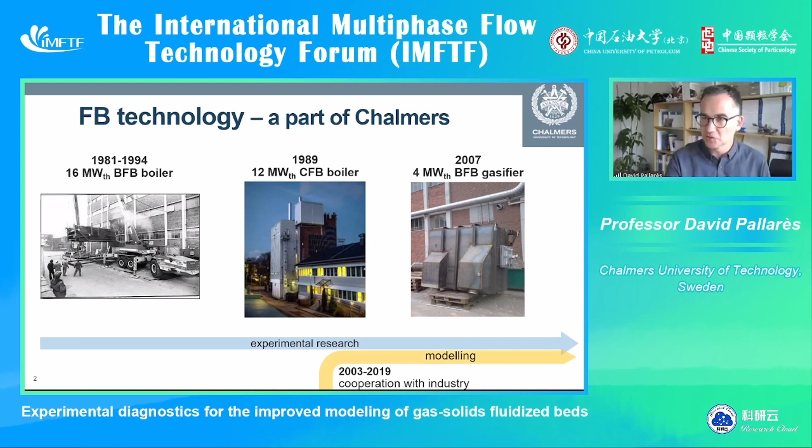Our group started experimental research from the installation of the very first boiler in '81, but we started with modeling also in 2003 - that's when I started my PhD and developed an interest in modeling. We then began cooperating with industry to develop models for fluidized bed combustion mainly, and now we've extended those to cover other fluidized bed applications beyond just combustion.

With that short background, here are the points I'll go through in my agenda. First, as I said, I'd like to talk a bit about modeling - not the focus of this presentation, but I want to link to it. Then I'll talk about fluid dynamical scaling, something we've used a lot in our activities and found extremely valuable. Finally, I'll dive into different experimental techniques which are not off-the-shelf, so to say - they are advanced and need development, but they provide information otherwise not attainable by classical techniques.

So let's start with the first section. It's about modeling. Here is a diagram which I really love. It's from Finland, Lappeenranta University.

Here they classified different modeling approaches for fluidized beds, and they divided this in space and time dimensions, depending on the resolution of those. Here we can see the different types of modeling. I will just activate my pointer.

So we have the most resolved modeling, like direct numerical simulation. This is a particle scale, and then we would enter discrete element modeling. We lose resolution—we are not resolving at the same scale as direct numerical simulation. And then we would go into still CFD, Eulerian descriptions.

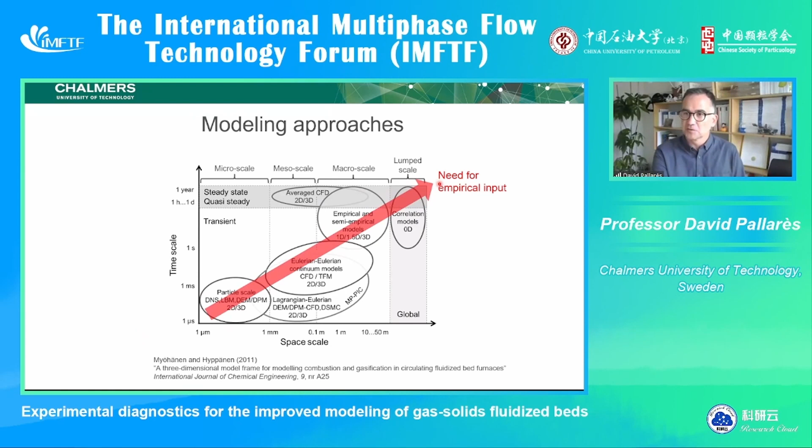So this is what I will speak about today: which techniques do we have at hand to provide this empirical input?

If we go to the different types of modeling, and we class CFD as the type of modeling that solves all of these balances—mass, energy, and momentum—then we have a lot of softwares. One of the most known is ANSYS. That's a commercial one, but there are other ones which are open source also.

And here, still today, I would say the main challenge is in the closure, the formulation and closure of the momentum balances. That's still a research field in itself. And again, the more you simplify—the most simplified version of CFD is this Eulerian approach—the more you need to compensate with some kind of empirical input, like for the subgrid models, for example.

So, in summary, I would say this kind of approach is most often used by researchers, sometimes by industry to solve specific problems or issues. And the computational cost related to other types of modeling is high.

Then we have the semi-empirical model I was discussing. We solve mass and energy balances, but not momentum balances. So what we do instead is substitute those closures of the momentum balance with empirical knowledge or some assumptions on the velocity field, for example. With this, we can reduce the computational time drastically.

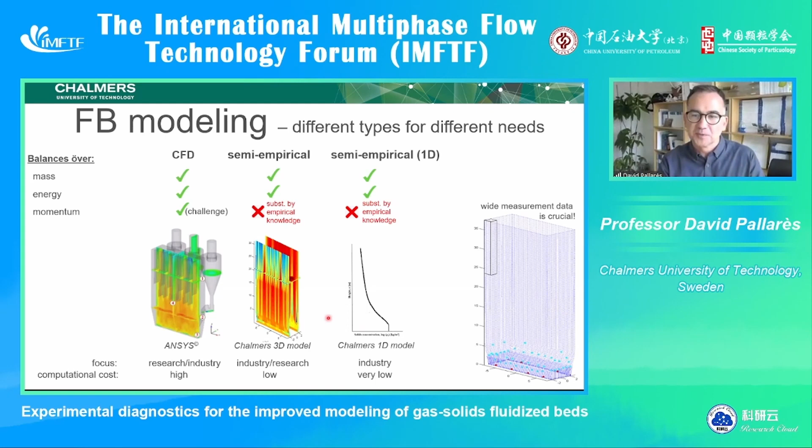So the semi-empirical modeling requires validation. These are measured oxygen concentrations at a 330 megawatt boiler. This is a measurement campaign at 19 meters above the grid, showing the oxygen concentration field. There were about 30 measurements, and then we could reproduce this oxygen concentration field with the one produced by our model. With this, we're able to fit different parameters like gas dispersion and so on. So this kind of data is needed for the empirical modeling and fitting of those parameters.

For 1D, what we need is experimental data from the process. So it's process data, typically heat flows, heat and mass flows of the steam and so on, so that we can calculate enthalpy heat flows from the furnace, for example.

So here we introduce our model, this is in Modelica, but there are other formulations, other softwares too. We substitute typical boxes. Some commercial codes have a fluidized bed box, but that's designed for chemical reactors, and they don't describe boilers properly. So we did our own box for a boiler, bubbling fluidized bed or circulating fluidized bed, that we can introduce in a steam process, on a steam cycle, and see the interplay between the furnace and the steam side.

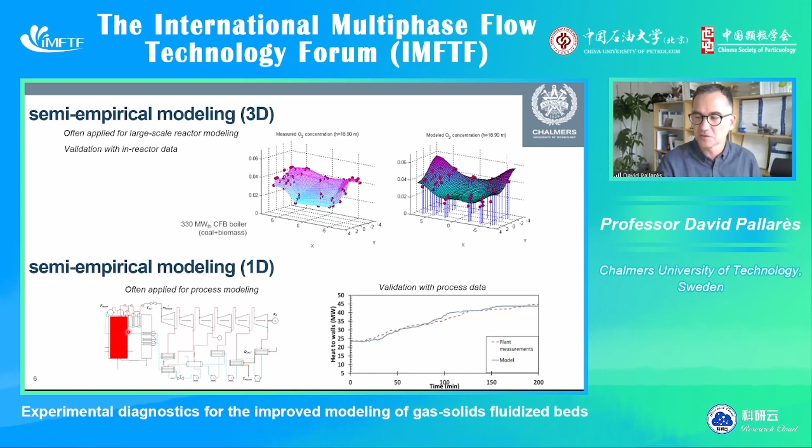Well, and this is the last slide. I think it's probably the most important in this presentation. No numbers, just words, but I think still it conveys the main message I would like to give. And it's that we always should look for an iteration, a synergetic iteration between modeling and experiments.

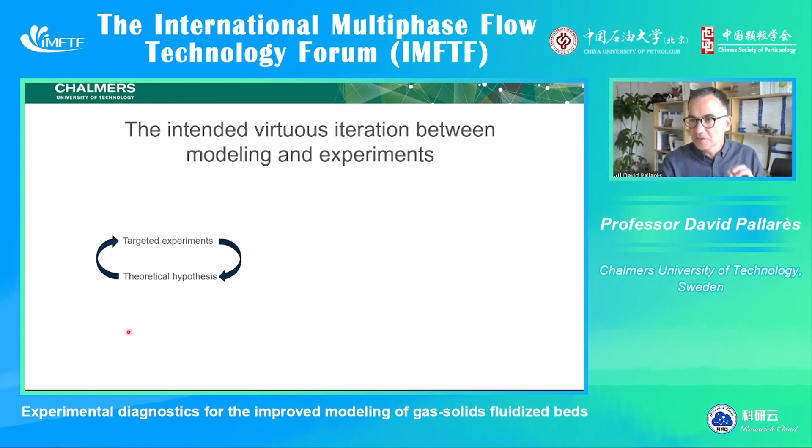So if we start with this iteration, typically when you develop a part of your model, a sub-model, you have a theoretical hypothesis on how things should work. Based on that, you need to define which kind of experiments you want to carry out in order to confirm or discard this hypothesis. So these are targeted experiments, experiments in which you attempt to extract specific information about a specific parameter. So this is working at a specific level.

When you have this new submodel, you can put it into your whole model and then run your large-scale simulations. So the whole model with momentum, mass, heat transfer for everything, where your newly developed module is included, and then validate this against large-scale experiments.

So here we have another iteration. Based on the agreement or disagreement of these simulations and large-scale experiments, you need to identify a new knowledge gap. With this new knowledge gap, you need to formulate a new hypothesis to improve your submodel. This will require new targeted experiments, maybe another variable, another parameter, another phenomena. And then you need to design how those experiments would look like. So I would say this is the optimal way to work when you want to combine modeling and experiments.

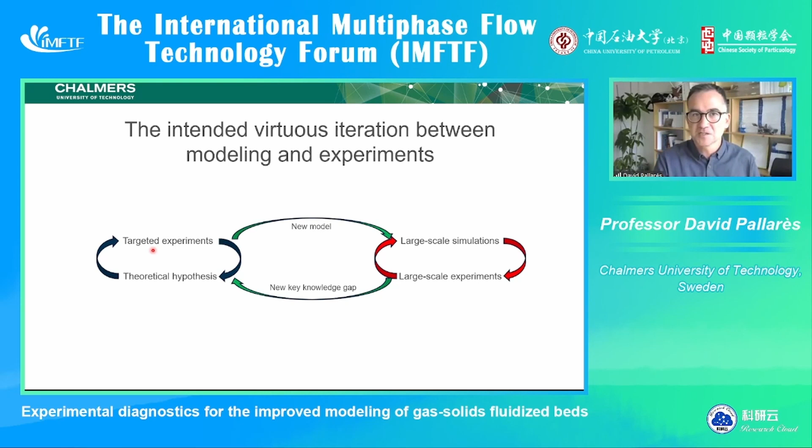And it's always a question of what should be first. Is it modeling, and then from this we define experiments, or is it experiments and from this we create a hypothesis and try to describe it through a model? I think it doesn't matter much where you start. The thing is that you should keep doing this iteration indeed. So this is a principle that we try to keep in our work, in our activities when we combine modeling and experiments. So with that, I move on to the next section.

That's fluid dynamical scaling. And very short, this is a method that allows us to keep the fluid dynamics in a scaled form at different conditions.

So we can have, for example, a large scale hot boiler or any other reactor or device, and we can do experiments at ambient conditions at another scale, typically much smaller and non-pressurized, but in a way that if we keep a number of dimensionless parameters constant, we will be able to scale up the fluid dynamics so that we can measure in our cold flow model and calculate what would be that value of that parameter in the industrial, large hot conditions.

Here are listed the different parameters. We have the Froude number, the density ratio, the Reynolds number for the particles and for the gas, and then the geometric similarity and particle size distribution. We also have the particle solids flux, and that's because this was initially intended for FCC reactors, where this is a parameter that you control. It's not an independent output of how you run the operations, but something that you control in your return leg.

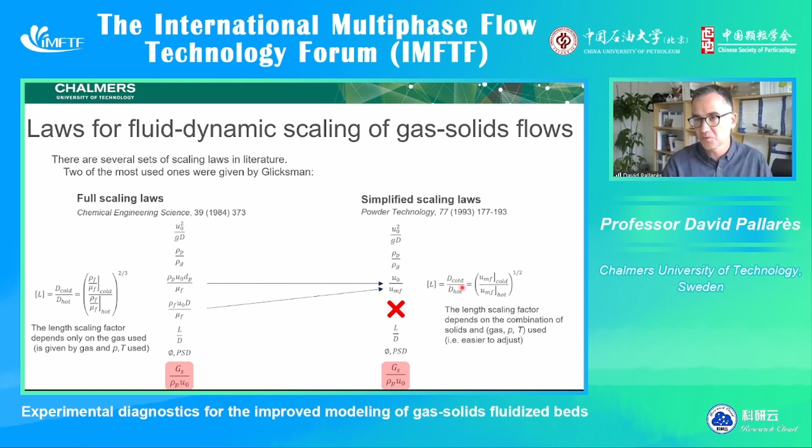You can go down to a length scaling factor from 4 or 5 in the full set for combustion to 9, 10, 13, 20. And that makes it suddenly much more realistic to have lab units. You can accommodate the scaling factor to the space in your lab and to your infrastructure, how much flow your fans can provide, and so on. So it's a very powerful tool.

Here is an example of the very first scaling unit we had. It was when the CFB boiler was installed. Then at the same time, a scale model of that CFB was built with the simplified scaling laws. And here we see the main consequences. The circulating fluidized bed boiler has this working temperature, 850 Celsius. At the lab, we have ambient temperature.

If we apply the conservation principles of the simplified scaling laws, we typically end up with a much finer bed material—here about 5 times finer—and also much heavier bed material. This compensates for the density ratio: as the gas gets colder, it gets denser, so the solids need to get denser too. So we need finer and denser material, typically fine metal powders, to keep the fluid dynamics the same as at hot conditions.

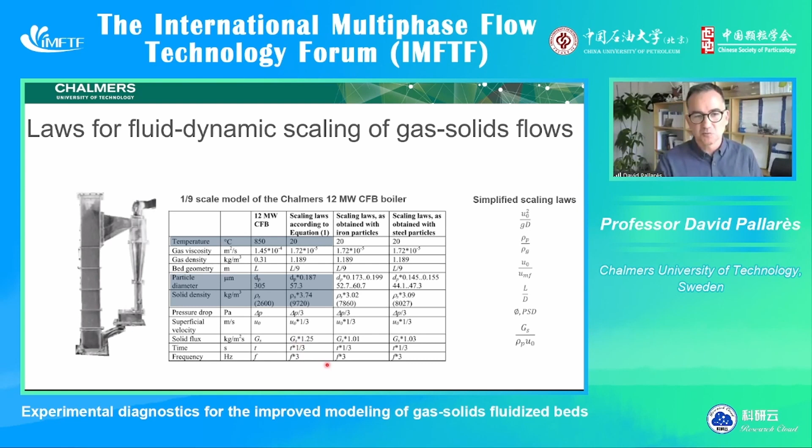Of course, there are a lot of other consequences. The pressure drop scales too. Superficial velocities, the gas velocities, change. Fluxes change, time scales change—these scale models go faster than reality. So if you record them and want to get a picture of the real flow, you need to slow down the playback of these videos. This is just an example of what we typically end up with.

Then the question is, why is fluid dynamical scaling good? I want to strengthen some of the factors which I think are very important. It gives increased operational flexibility.

We know that when measuring in projects with industrial partners, it's difficult in industrial campaigns to tell them how to operate—to say now I'd like this load level, now I'd like this amount of secondary air. Operation is not adapted to your wishes; typically you measure whatever is being operated at that time. But instead, in cold flow models, you can adapt the operation and operate in ways that would never be allowed in real boilers. This gives you a tool to explore operations you would never otherwise have.

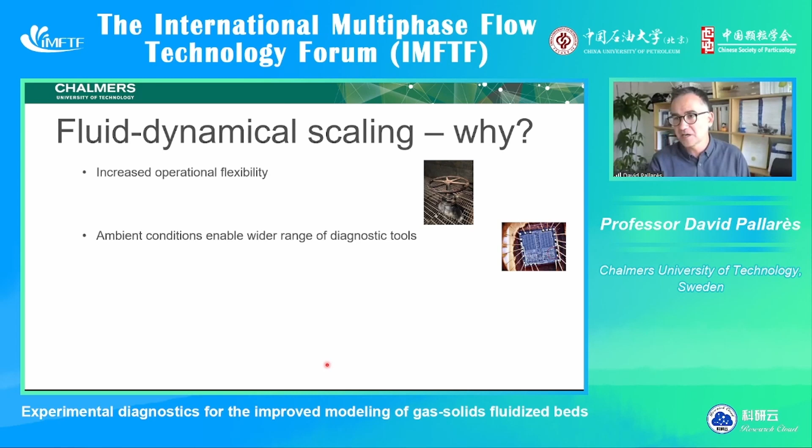The other benefit is that if you choose to have your lab model at ambient conditions, it enables a wider range of diagnostic tools, which would otherwise be too delicate for these harsh, hot environments. Also, ambient conditions are safer—typically only one person can perform experiments, whereas at an industrial site this means many people have to be there, raising safety issues. And finally, they are much, much cheaper too.

So these are strong reasons, all of them—I think each just by itself makes a strong argument for using fluid dynamical scaling. But the nice thing is that the results you get still have the same value in terms of scientific research, while also being able to tell industry this is what is happening inside your reactor, inside your unit.

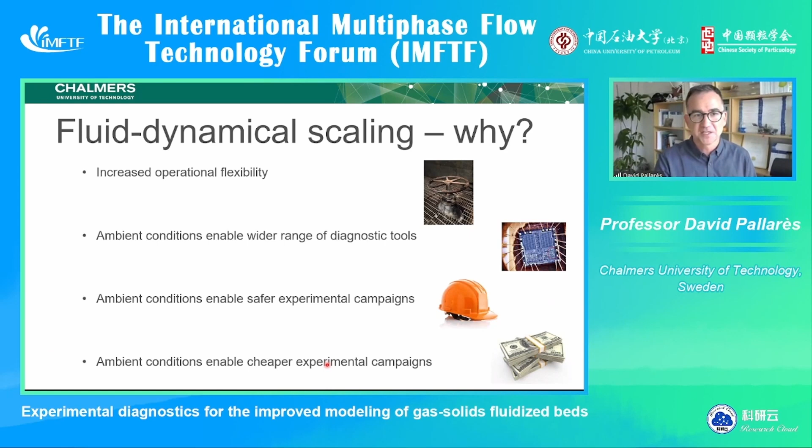We had this project with a boiler manufacturer, and we scaled down one of their best sellers. This is typically the CFB boiler we sell the most—it's co-firing biomass and coal, between 200 and 300 megawatts. They said this is representative for our CFB boilers, our whole portfolio.

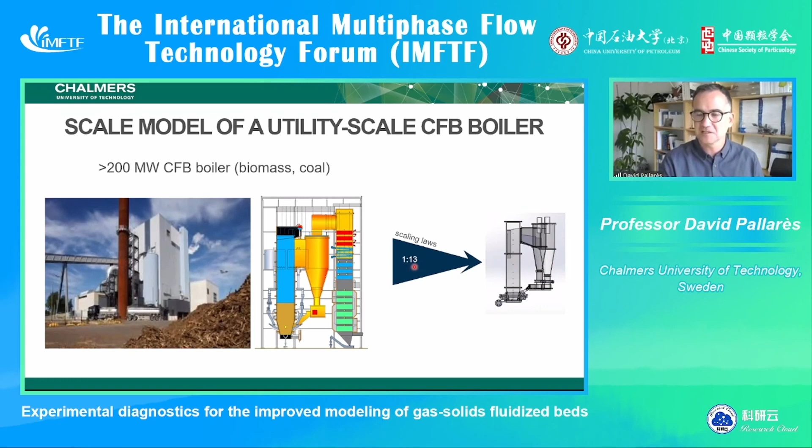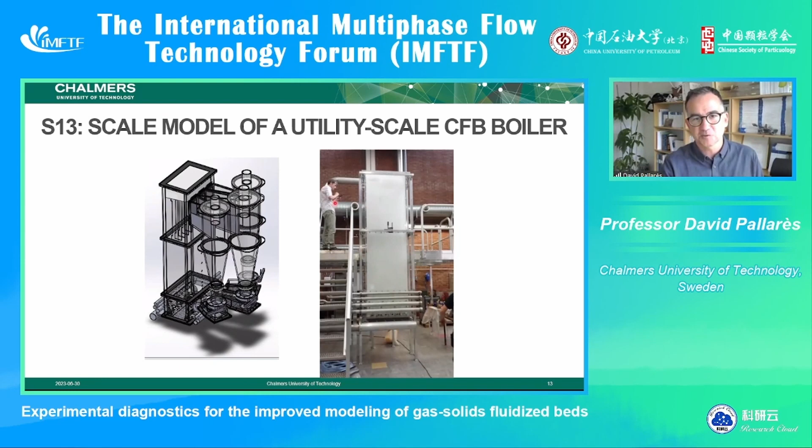So we took this one and scaled it down using the scaling laws I just presented, the simplified set, which allowed us to use a scale factor of 13 so it could fit nicely in our lab. It ended up being about 3 meters tall in our lab, versus 40 meters in reality. Here you see it—I used to say this is our tallest professor, which gives you a picture of how tall this unit is.

One key thing in the design, I just want to point out quickly, is that you have a solids population balance both in reality, in the real boiler, and in your lab scale model. Here it's very important that you try to match the same particle size distribution in your CFB loop.

What we did was take samples in the furnace and samples in the loop seal, the return leg—because in industrial boilers, the return leg typically contains as much material as the furnace, but they differ very much in size distribution. So you need to take both and see what is, in total, the solids you have in that boiler, then scale those down and put them in your unit.

Now, once you've scaled the solids down to the inventory you want in your lab unit, the important thing is not to lose them. If your cyclone is not 100% effective, you will modify the distribution you're feeding, changing what you want to have inside. This differs very much from a cyclone in a real boiler.

A cyclone in a boiler wants to have a cut size in which fines are not accumulated, because that would be a severe problem for the boiler if the distribution of the solids becomes too fine. So there is an intention of letting the finer particles go, but in the lab scale model, the intention of the cyclone is to capture absolutely everything, because we are feeding the solids inventory that we want to see inside our unit. So these kind of units at the lab scale require extremely efficient cyclones.

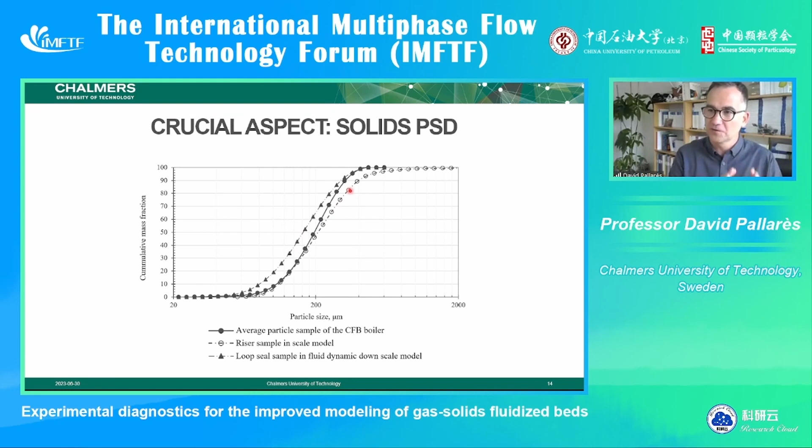Here we see samples taken from the boiler: one in the furnace, and one in the seal, and then the one that we were feeding in the boiler. So this is the one from the boiler in average in the middle, and then the ones we have in the furnace and in the seal in our scale model. As we see, we managed to keep the average that we want in between the two, between the furnace and the loop seal. So this is very important.

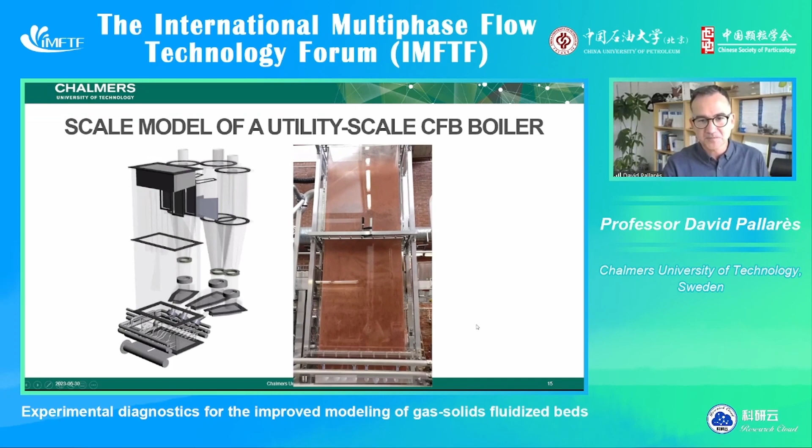So the first thing you do is validate this - is the scaling working or not? We took 4 different operational cases from the real boiler, and measured the solid concentration profiles with pressure taps. Of course, we are able to put more pressure taps in our scale model than there are in the boiler. So we had 4 different cases at different velocities.

This is for the highest velocity - I've marked with a red line the 1 kilo per cubic meter level. This is high fluidization velocity. As we go down in fluidization velocity, the solids concentration at the freeboard falls down. But for all 4 cases, the scale model in our lab managed to recreate and resemble the fluid dynamics in the boiler. Once you have that validation, you can start doing your research.

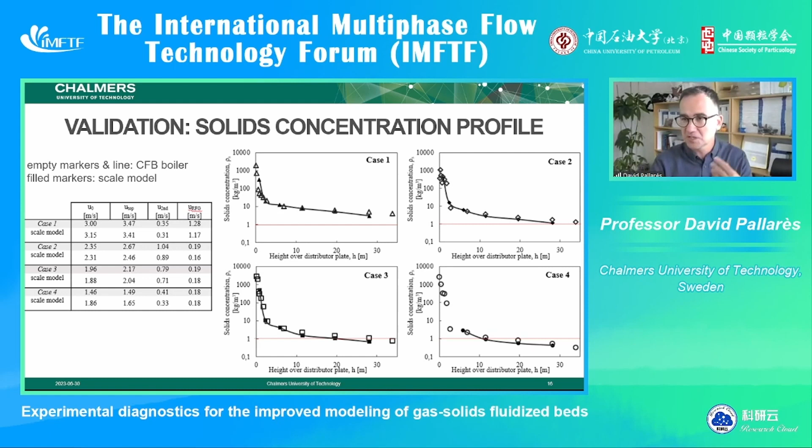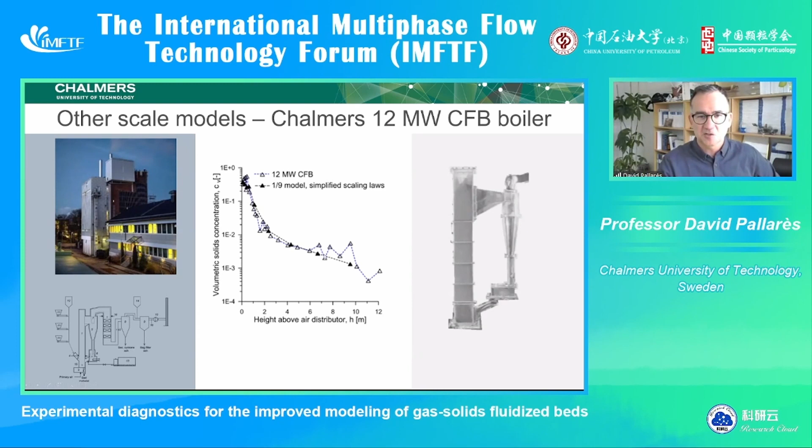What is that research about? Well, you can do a lot of things, and I'll talk more about this later. But for example, this is validation for the Chalmers boiler once upon a time - again the solid concentration profile against data from the boiler, and it was fitting nicely. Then you can start doing research in your lab unit.

For example, one thing we wanted to investigate was introducing a tracer gas somewhere in the freeboard, and then it will disperse. If you put a probe and map the whole lateral profile of the tracer gas concentration, you are able to calculate the gas dispersion, the lateral dispersion. We did this both in the boiler and in the scale model, and here are the results. As we see, the gas disperses at the same rate in both, after scaling of course.

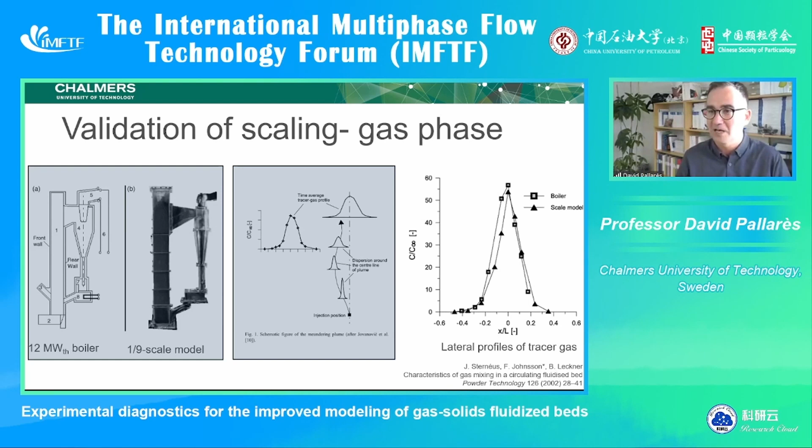So with this, you can do a lot of things that are difficult or costly to do in a boiler. Another study is even more advantageous - you can change geometry very easily in a scale model. These are made of plexiglass, and if you build it modularly, you can change different parts. So over time we've changed different parts - for example the bottom, the taper walls, what happens without taper walls, what happens with the angle of the taper walls, what happens with the inclination of the secondary air injections, what happens with the exit region geometry.

That's a quite important question for CFBs, because you have solids flow reaching the top, and the popular belief is that everything - the upflow you have in the upper furnace - will make it to the cyclone. But in reality, what we've found after measurements is that it's actually just a small share often of this flow that makes it to the cyclone. Most of it instead will be recirculated inside the furnace. That's critical for the design and operation of CFBs of any kind, because the external mass flow, the circulation of solids in the loop, is a design parameter that affects a lot the heat balance closure, the mass balance closure in chemical applications, and so on.

So it's important, and what we can do here is change the geometries of this exit easily to see what is the impact of that on the circulation. This is the backflow, so how much of the solids don't make it to the cyclone, of the solids reaching this upper exit region. And we see that this correlates to the Stokes number.

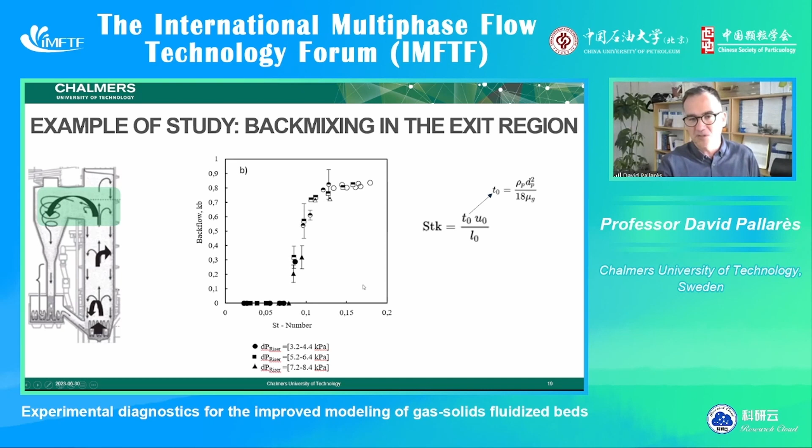So these are studies that we're able to do. We can also change geometry, and we try different geometrical configurations to see the effect of this.

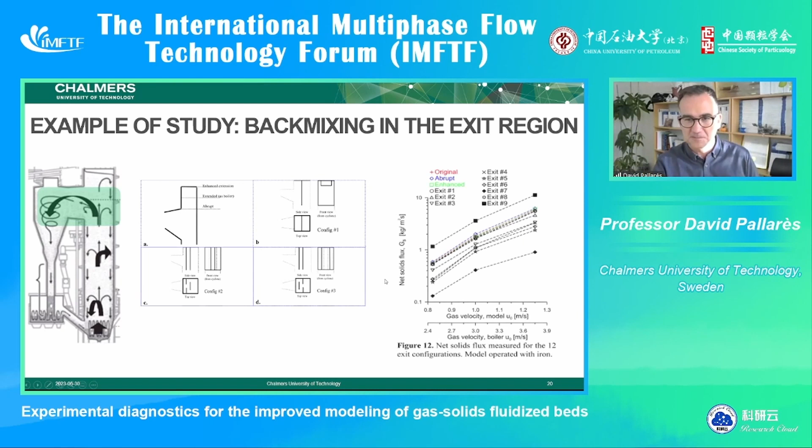Good, then I can jump into experimental techniques. That's the last section in my presentation. I will go through three of them: one for particle tracking of individual particles in gas-solids fluidized beds, another for tracking of the solids phase as a continuous phase, and finally a technique for the diagnostics of the solids flow.

So for particle tracking, it's about tracking one individual particle immersed in a fluidized bed, and we have been working with this for quite a long time now. It started pretty much with our projects on gasification. This is our 4 megawatt gasifier.

And of course, it's important to know what is the mixing, what is the fate of a biomass particle, in which regions it is located, and what will be the typical mixing, axial segregation, residence time inside the gasifier, and so on. It's important to know what happens to a biomass particle after it enters such a unit. This was a 4 megawatt unit, and after this, a 20 megawatt unit producing synthetic natural gas was built here in Gothenburg.

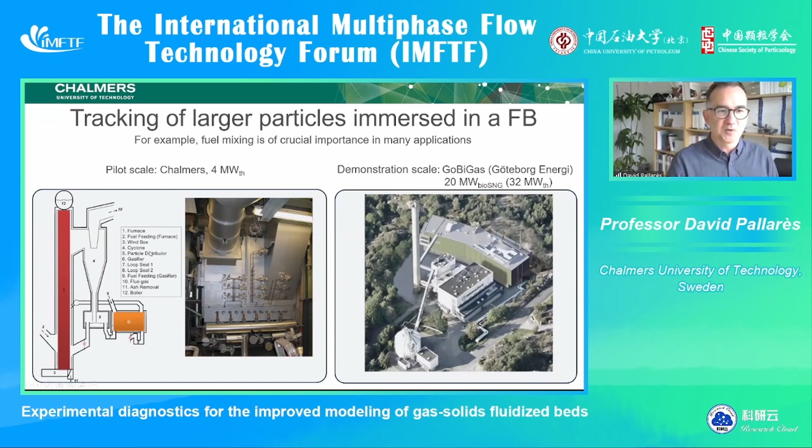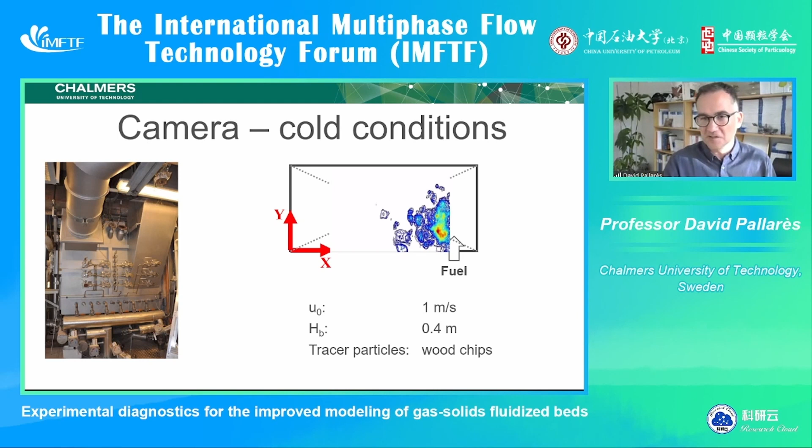This is what we have, for example, in a scale model. So we did a scale model of this also. And we saw that for low velocities, these particles were accumulating in some regions in between the preferred bubble paths. So these are regions with bad fluidization in which particles accumulate.

And then if we increase the fluidization velocity, we'll have a much better mixing with a lot of immersion of the particles inside the bed, where you can hardly guess where the nozzles, the preferred bubble paths, are. So this was for a scale model, but we also did this with a camera, a hot probe camera, in real operation.

So we have the equivalent condition as this one in our boiler, and as you see, it pretty much resembles these accumulation points. While if we go to the 7.5 case, we see that the mixing is much better, the particles do not float anymore and do not accumulate at certain regions. So again, the scaling is able to reproduce and resemble the real conditions of the mixing.

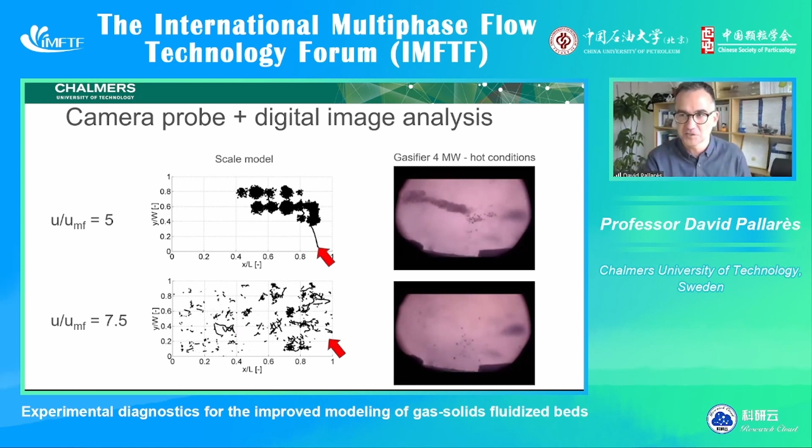We did digital image analysis also in the scale model of the gasifier. This is how an experiment looks like that provides the data I just showed in the last slide. And then, of course, you can compare, and you can see that the hot and the cold unit provide the same dispersion coefficient.

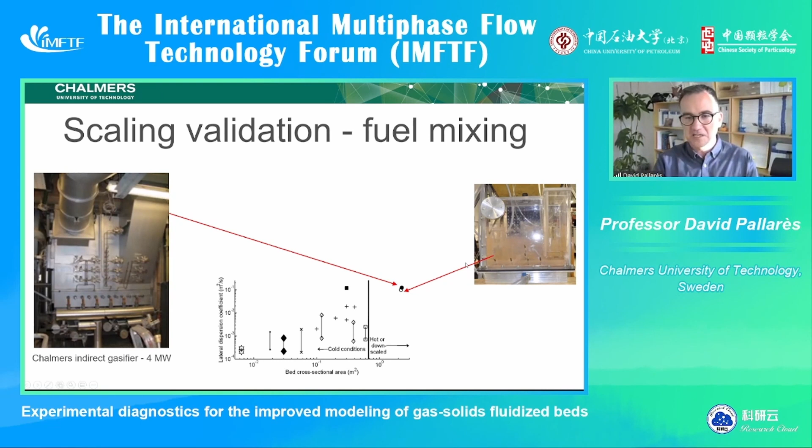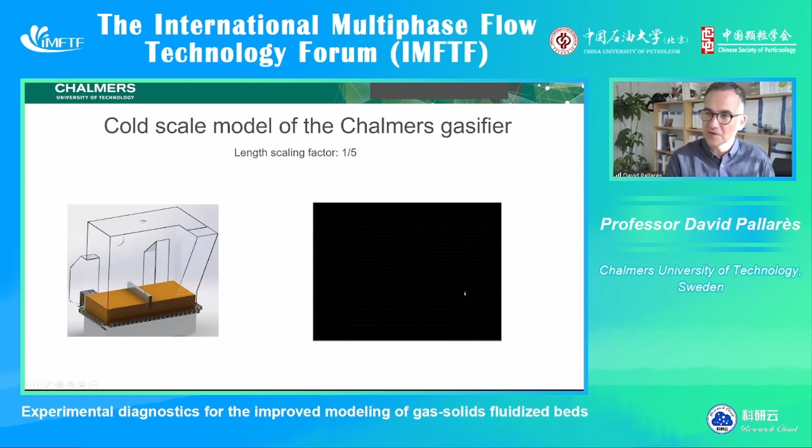So this was nice to see, but then once you have validated that the scaling works, you are interested in getting more information at cold conditions. So instead of just seeing the particle when it's floating on the surface, because we are recording from upwards, we would like to track the particle the whole time. So that's when we started to think of a method: can we track the particle when it is immersed in the bed also?

So the principle is easy. We have magnetoresistive sensors, a number of them. If you have a magnet in the vicinity, it will create a magnetic field, and this sensor will sample that magnetic field. If you put a number of sensors, you can overdetermine this system so that you can reconstruct the location of a particle. And if you do this dynamically, you can reconstruct the trajectory. So we have tracking in 3 dimensions.

Spatial resolution right now is 1 millimeter. We are working to get this better. Temporal resolution can be very high. We choose 200 Hertz, that's enough for our purpose. And then we are also working on reducing the magnet size. Now we have it down to 3 millimeters.

So what we do with this is insert our magnet inside a capsule. And in that capsule, we can have a filling or not to provide it with the right density, resembling different fuels. So with this, we can get velocity fields, concentration fields, residence time, dispersion rates, and so on.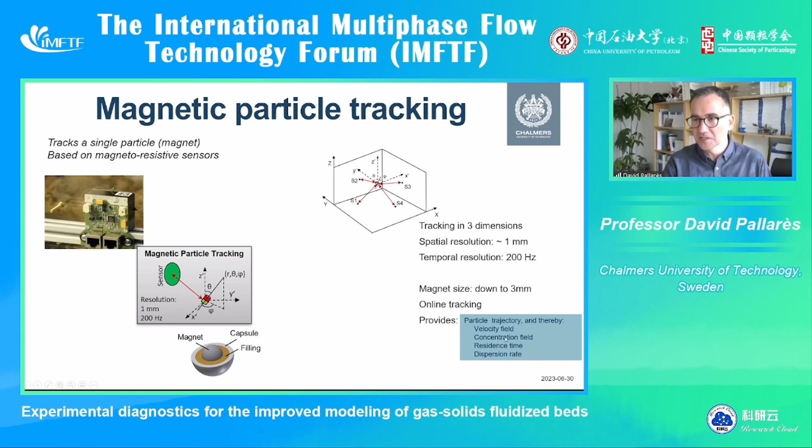This is a video showing the first validation of the online tracking. We have a pendulum movement, and then we see that we can online recreate this pendulum movement of our magnet.

And then when we insert it in a bed instead, this is a bed with 4 sensors, this will be the tracking of the immersed tracer that we have.

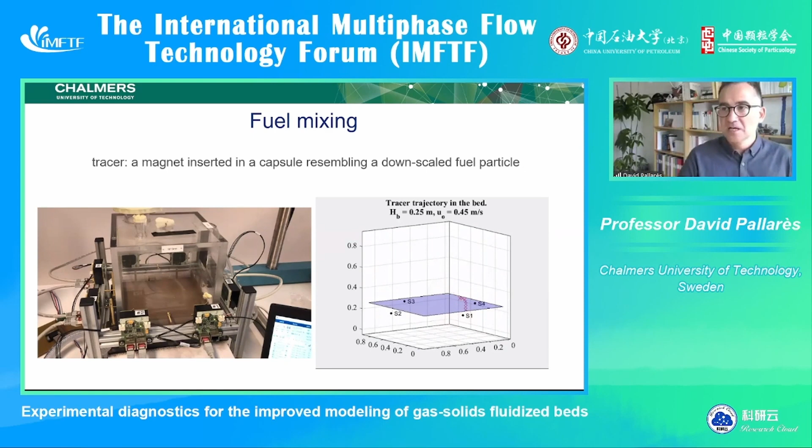And with this we have worked for quite many years now. We can have a trajectory, and from this trajectory, given enough time to make statistics robust, we can get velocity fields, concentration fields, and also distributions.

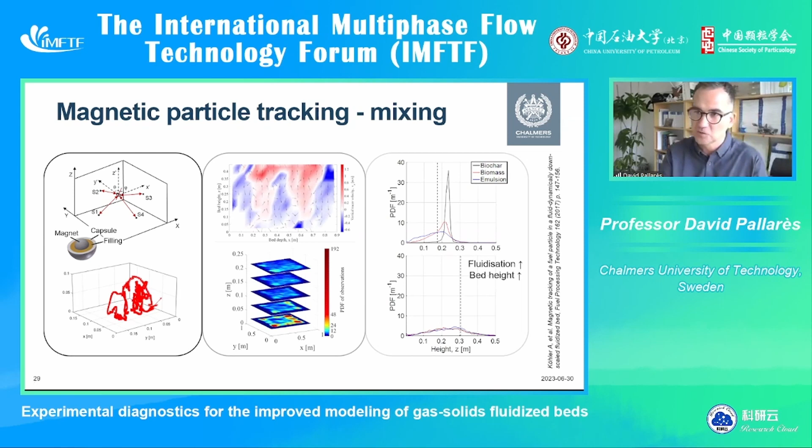So we have been working on providing this information to modeling in order to create more reliable models of this.

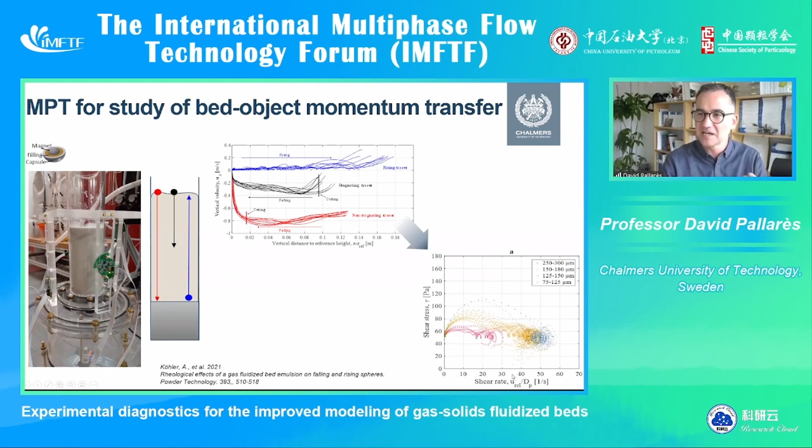Another thing we have been doing is to look at the momentum transfer, and then we can have different trajectories, and from this have the rheometry of the fluidized bed. So shear stress against shear rate, and study what is the rheology of the fluidized bed.

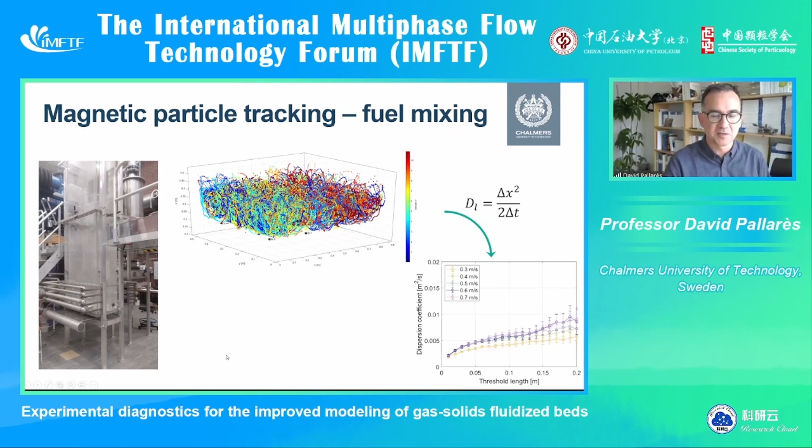And now we are applying this magnetic tracking to the large scale model of the boiler. I will rush to solids tracing. I will employ 5 minutes more of my time.

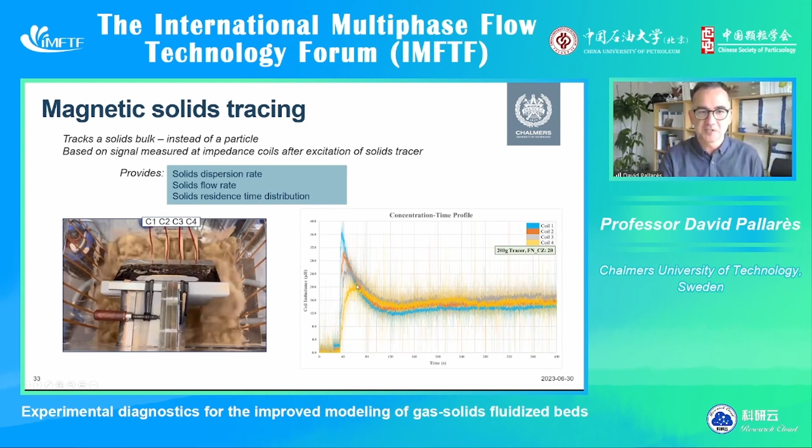Now the signal can be used in many different ways. You can create convection diffusion models to estimate what is the velocity of this solids flow, what is the dispersion, lateral dispersion of the solids flow. This is something we are doing.

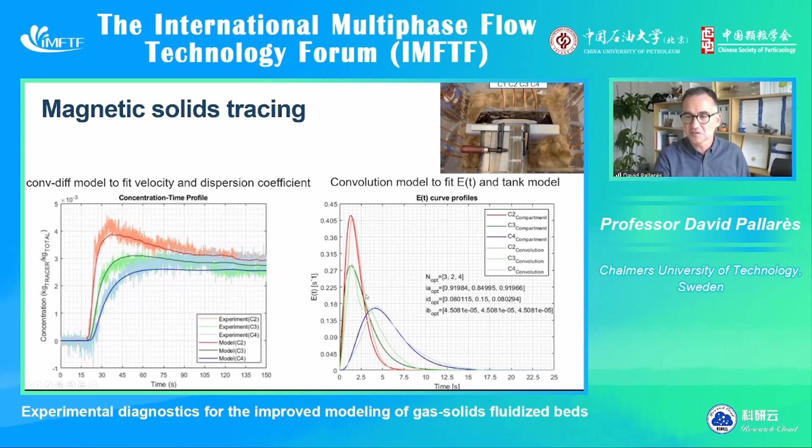Also, you can use convolution models to fit the residence time in between two chosen coils, and from that also develop a tank model for that. This is something we have done. For example, between C1 and C2, the residence time distribution would be this one. So this is something that's doable easily with these coil measurements.

And finally, I will come to what I typically call the jewel of the crown. It's a technique that we have developed in the last couple of years, and it's based on radar. So just a short background: typically in fluidized bed technology measurements, tomographic measurements have been based on an emitter and a receiver.

And then the signal that you get in the receiver is a function of the integral absorption of the signal through a whole path, and that's been the principle. Then if you have different emitters and receivers, you can increase resolution of this. But in principle, it gives you one value, which is an integral absorption.

Now, the radar principle is very different. What it does is that every time it meets solids, it reflects a signal depending on the concentration of the solids that you have right there in that point. So it's a resolved measurement along the beam.

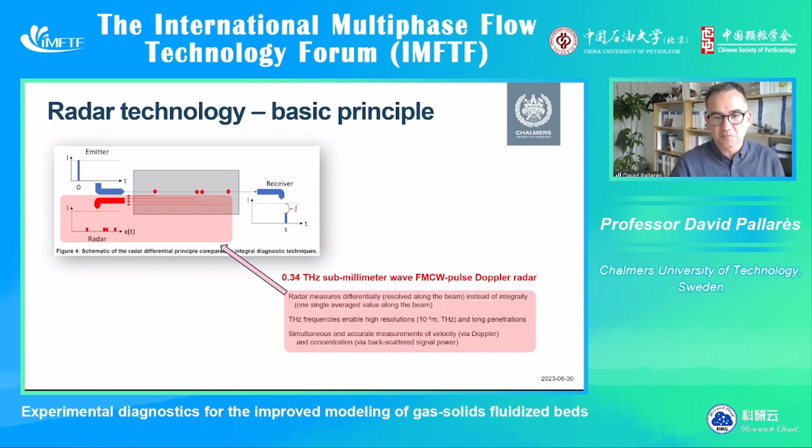Now, the higher the frequency of this radar beam, the more resolution you will have along this beam. So we have now used terahertz frequencies that give you resolution which are sub-millimeter, about 120 micrometers resolution. So with this, we can tackle typical problems.

It's non-intrusive. It shows to have long penetration lengths, which is good. So in that way, it is better than, for example, laser. It has high resolution, good accuracy, I will show that. And then we measure at the same time concentration through this principle, but also velocity through the well-known Doppler principle of the radar measurements. And we can have the emitter and receiver in the same device, so we need only one access to the unit instead of two.

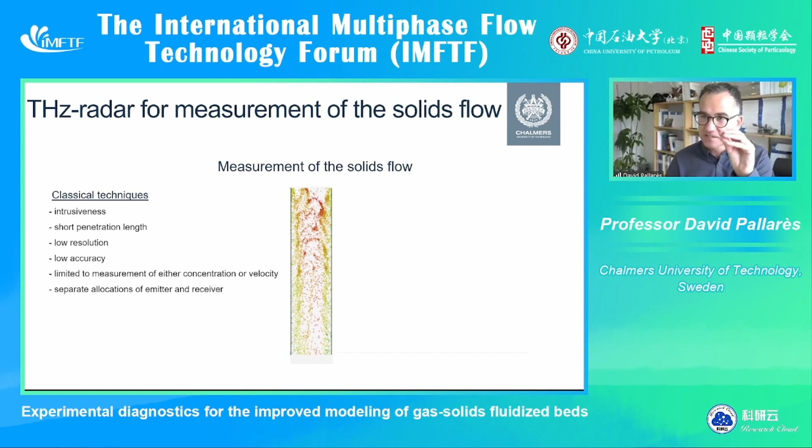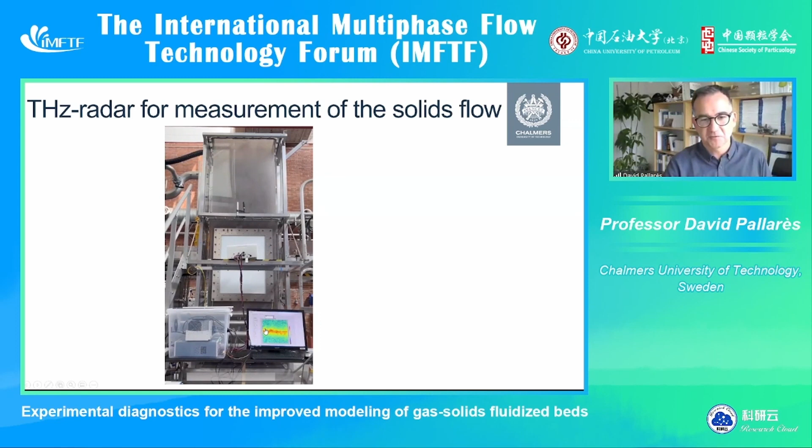With this, I will show how it looks like when we employ it. The radar, you see it here, it is pointing at one location in this window, and as you see, the bed is operating. And this is the kind of raw data that we get before processing. Finally, when we process, we obtain this kind of profiles.

This is the typical solid concentration profile you would derive from pressure measurements, and you see the scattering in the data, while with radar, we have very nice, very continuous profiles. At very, very high concentrations, we tried the limits, and there is then a limitation in the penetration, but these are far above the ones at which you operate the units typically in commercial operation.

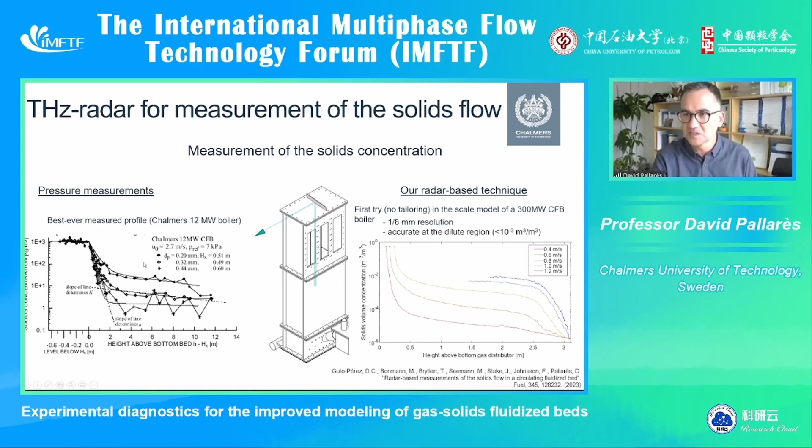We can also measure velocity profiles, not only concentration. So this is from the top, what is the average velocity for different conditions, different gas velocities. And what I think is most valuable of the whole thing is that for each of these points is an average velocity of the solids.

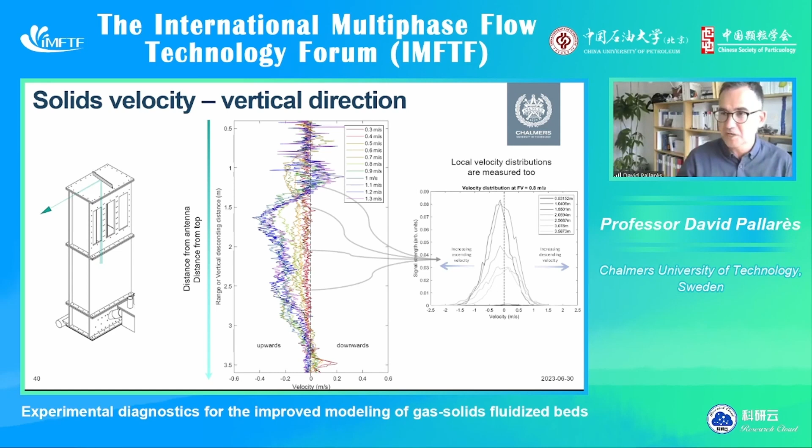But for each of these, we can break it down into a solids velocity distribution. So we can see how many of the solids are moving upwards and which fraction is moving downwards, for example. So this is a very, very well-resolved distribution. I think this is very valuable, and also at a very nicely resolved temporal resolution, which opens for measuring continuously and with good accuracy and nice spatial resolution, measuring, for example, granular temperatures, turbulences, and so on.

This is an example of measurements from the side, and this is a typical profile of concentration, lateral solids concentration for different velocities. As we see, when we increase velocity, the solids concentration increases accordingly. And this is velocity of the solids also.

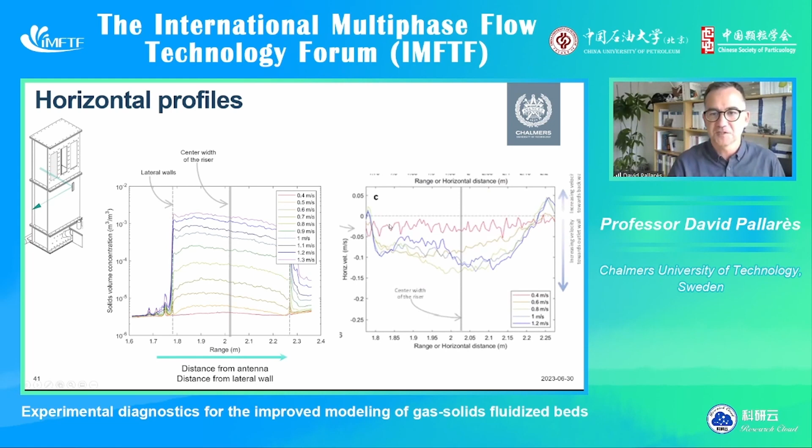So with this, I close my presentation. There is one more slide with some main messages.

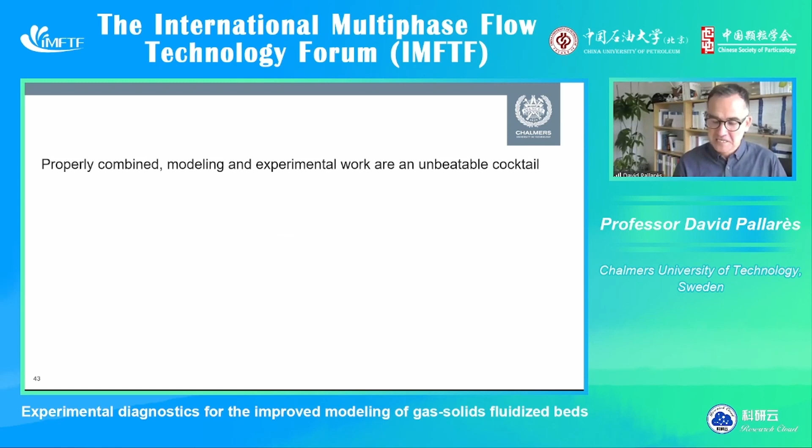Three of them. The first one would be that properly combined modeling and experimental work are an unbeatable cocktail. That's how I chose to define it, but they are very powerful if you combine them. So modelers and experimentalists, they should meet more often and talk more. Modeling development needs targeted measurements, not only large-scale measurements, devoted to extract specific information from specific phenomena. So we more and more need to think of what we need to measure and find techniques for that.

And finally, my main message, I would say, is that for many years, fluidized bed technology has been limited by the lack of measurement techniques accessing some parameters. But now, with the latest development, we have novel techniques that access those parameters. So now we are, I think, on the verge of a new stage where experiments can provide us with that information. So that's, I would say, a new paradigm.